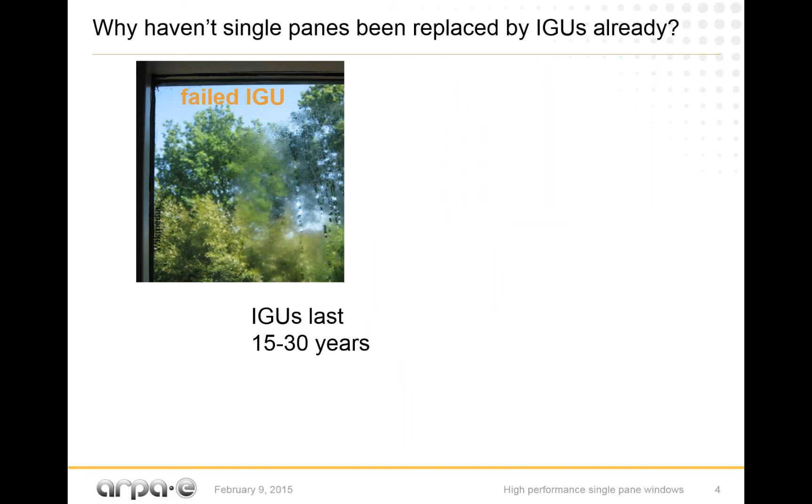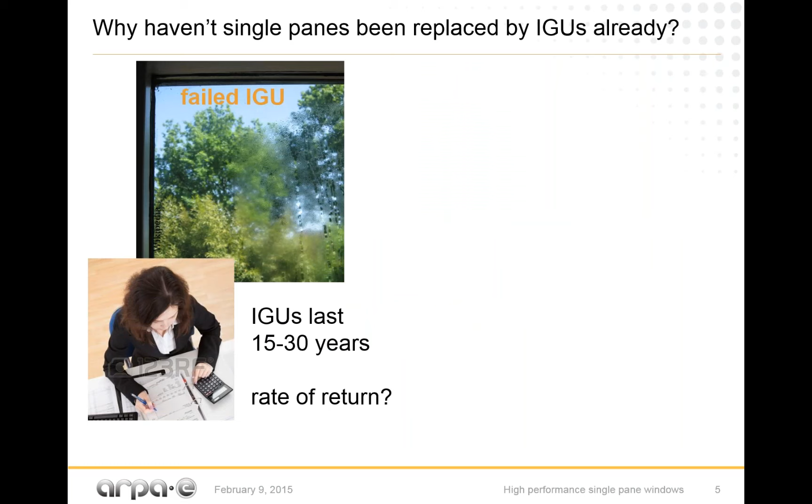So then why haven't single panes been totally replaced by double pane windows? And they've been there for 15 to 30 years. They're extremely expensive, and the rate of return is 10 to 15 years. So that's part of the reason why it doesn't have a wider adoption than it has.

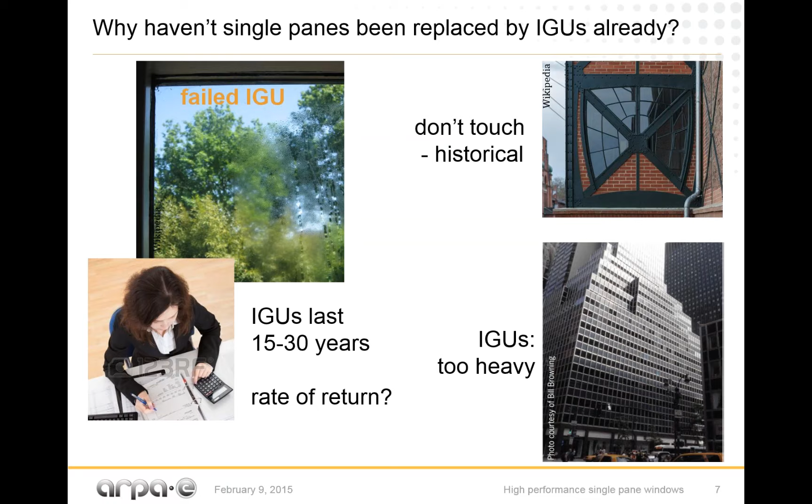So let me start first, before I tell you about the SHIELD program, with a little bit about ARPA-E. Maybe a lot of you know about this, but anyway. In 2007, the National Academy recommended to Congress that they create the Advanced Research Projects Agency focusing on energy. And it would be part of the Department of Energy.

And that was the goal, and I really feel that this is why most of the people in ARPA-E are there; they truly believe in it. It is creative, out of the box, transformative energy research, where risk and potential payoffs are very high, and where if successful, it will provide dramatic benefits to this nation. And since we're talking about renewable energy, this has been an incredible drawing card for them to hire people.

They have three pieces to ARPA-E. One is climate change. The other one is improving energy efficiency, and we have a lot of automobile programs and so forth. And the third one is renewables, and through renewables reduce energy imports.

We feel that we catalyze innovation because through grants and programs we can provide enough synergy for people to be free to innovate and have new programs. And with this forefront of innovation, all our teams are mixed university or company teams, very broad teams, and that seems to work very well. I think in the last 6 months there was a single program that is just one institution.

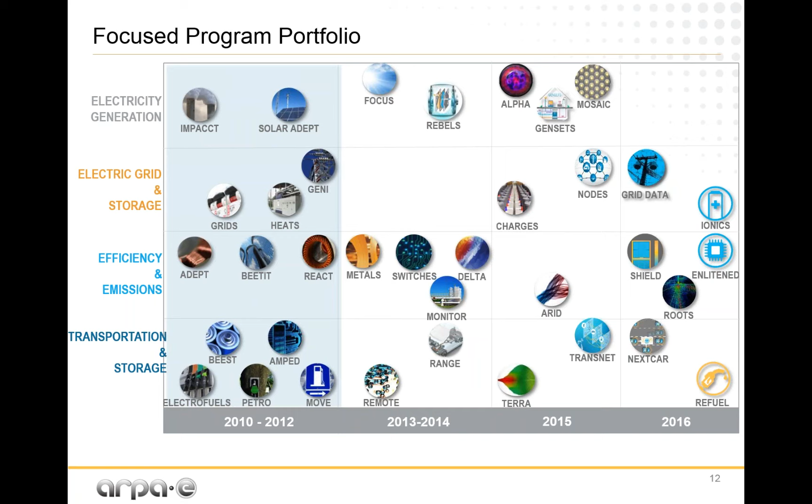So, like you see in any institution, I don't know about university, but in industry you see very clearly: you start with a number of programs, and out of those only a few make it to market. So it's like a funnel. And what we see at ARPA-E is essentially the same thing. We fund a lot of programs. Just a few, like 10 to 15%, are actually successful enough to make it to market.

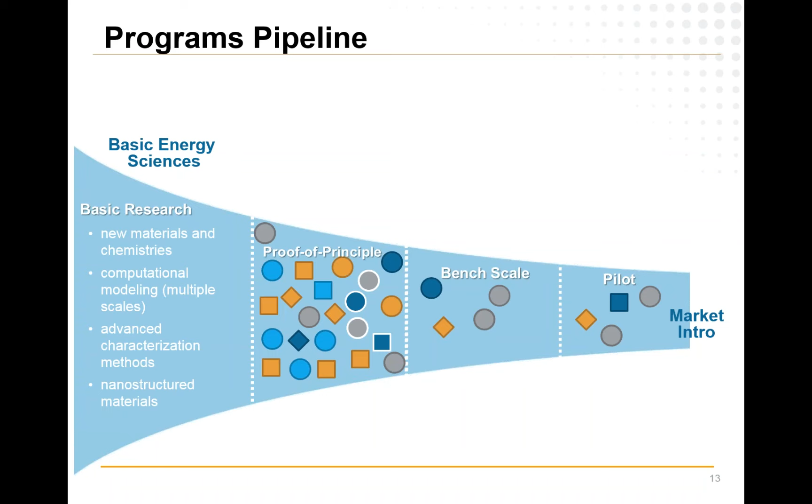So how we view ourselves is that when they apply for the grant, they are somewhere here. The program is still in the lab, really very basic research. And you see a percolation here, a loss; where it's clear there is no market or the technology didn't work out, whatever the reason, they will not make it through. The good ones, when they leave ARPA-E, are almost ready for pilot scale. The top 15% of the programs are either at a startup level or an incubator level.

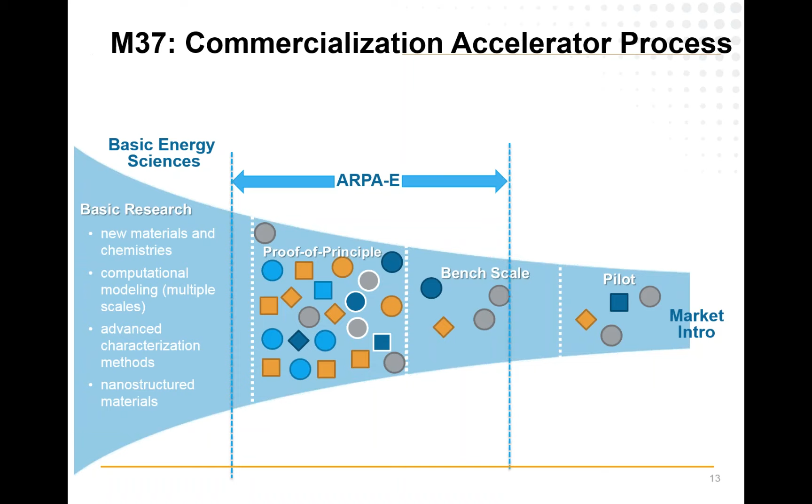But we still have to bridge this gap to market, right? So right now, 50% of my time I'm trying to design a program to help bridge this gap through external funding in combination with ARPA-E. Because if we make it this far, we have to push them this far. So just to go over that funnel, this is the distribution of the awards.

In the year, the people that are graduating this particular year, 2016, we have 41% of the awards go to universities, 32% go to small companies, 15% to large companies, 8% to national labs, and 4% to nonprofits; HARP, for instance, will be listed under nonprofits. Does that represent the prime? So this is of the awards, the prime.

Yeah. But if you take the 15% that are top this year, and it's interesting because between the top 15% and the rest there is a big gap. It's not that there is a gray area where you don't know where to put the cutoff. It's very clear where the cutoff is. And out of this top 15%, 63% are small companies. So university is pretty good. No national labs, the non-profits are also gone, and the large companies have decreased a lot.

So could you define what is top 15%? What is that? That you're at the incubator level or startup level. So is that you have a technology that people want. These are the applications that you receive, the top? No, this is after 3 years of the program. Oh. This is at the end of the program. Okay. So it's very clear who can go somewhere, who cannot. Okay. So there's still pre-launch

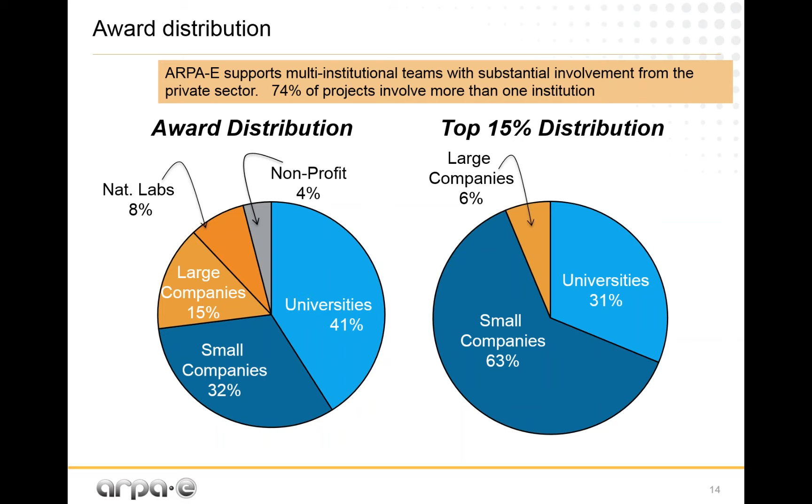So as we transition from R&D, from an idea into commercialization, you need money at different stages, of course, but there are some clear places where programs die. The first valley of death is getting out of the R&D phase into the prototype phase. The second one is trying to scale up, have a demonstration and deliver. And the third one is when you really have to go to manufacturing, where much more serious money is needed.

And what we're doing is we bridge the first two valleys of death with ARPA-E grants, and in a way we de-risk the program considerably, right? And I still have the feeling we give them a little bit more help with the transition and help them take it to the top.

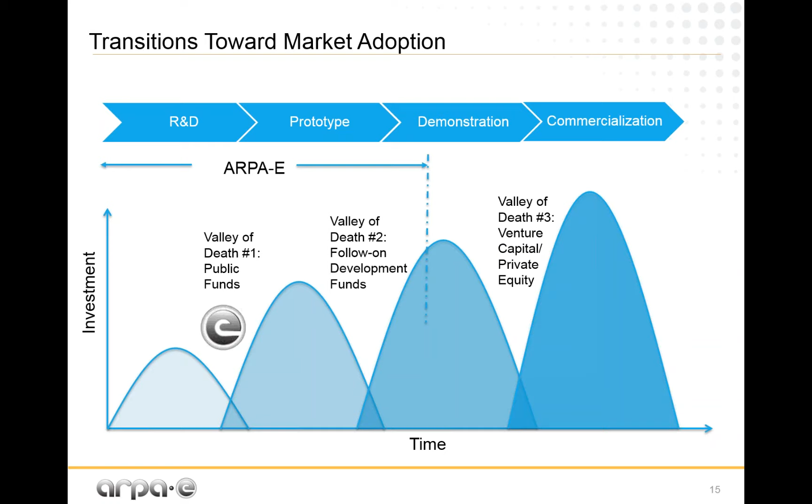So the next question that we always get asked is how DARPA and ARPA-E are different. There are a few differences, but we are very similar. The main difference is the tech-to-market focus and the fellows. We have a group of fellows that are keeping up with the technology much more than the rest of us. And the tech-to-market, which is my function, we have a large group, about 30 of us.

And the thought here is that from the very beginning of the grant, our job is to focus the group on whether there's a market, where you will enter the market, how much money you will need, how much it will cost to manufacture whatever you think you can manufacture. So stay focused, this is not an academic exercise. For us to succeed, they have to make it to market. So we're pushing on that.

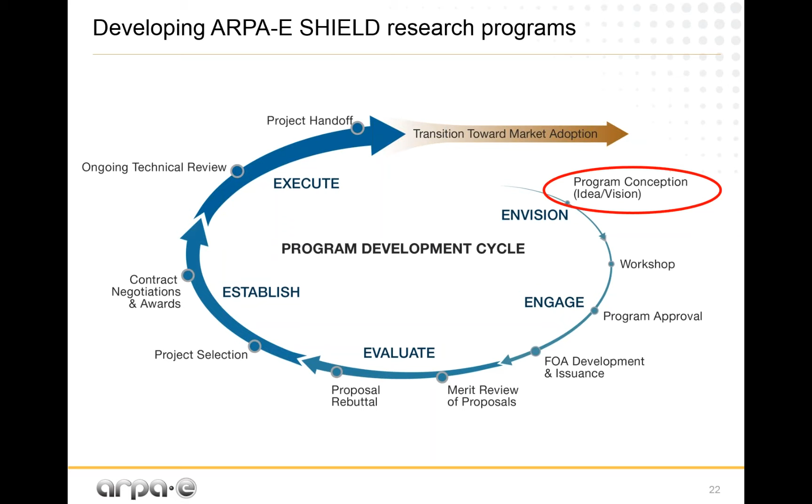So let me start on the Single-Pane Windows program with the program idea. So this is the reception area at ARPA-E. And you have these huge windows that are single pane, and everybody's always walking around with jackets. I mean, I have a coat in my office in the winter. Everybody else does, because you cannot live there in the winter and the summer. So I'm not surprised Eric chose to work on it because it was a survival technique.

But in the US, you have roughly 10 to the 10 square feet of windows. So you have 3 square meters of windows per person. So let me just do a little bit on windows. We have single pane windows, which is what we're going to be addressing. Double pane, which is what most people have in their house. And triple pane, which in Europe, for instance in Sweden, is standard, and in the US we have pretty much 0 triple pane. So how do you define windows? By the U factor, which is the heat flow from the interior through the window to the outside. If you want the window to be perfect, you have no heat flow, so U would be 0. The larger the U, the worse the window is. In a single pane window, the U is 1.1, and if you put a low-E coating on the window, you get down to 0.7. In the double pane, it's much better. You go from 0.7 to 0.3 with low-E.

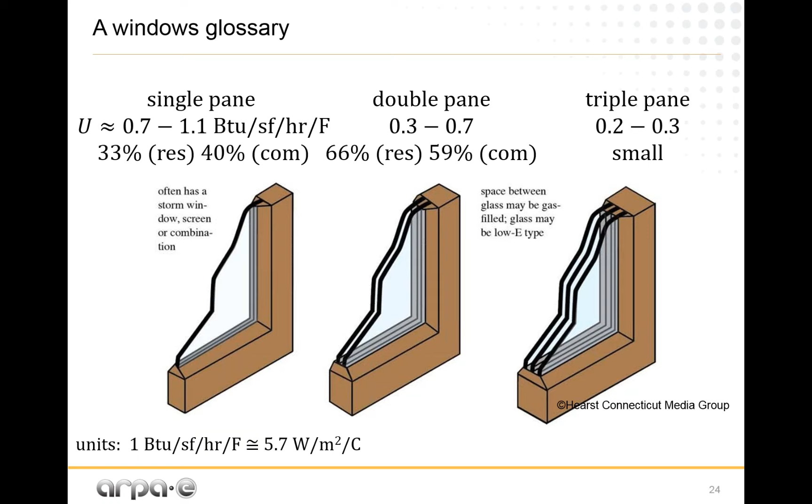How much energy are we wasting in the US? We are using 100 quads of energy per year. From that 100 quads, 15 are used for building heating and air conditioning. And from that, 4.7 literally goes out the window. 2 quads go out the window for single pane, and almost another 2 go out the window in double pane. The net solar is the difference between what you use to cool your house in the summer minus what the sun is heating through the window in the winter. So it's not so bad actually, because you use the sun in the winter. The bad thing is that 30% of the windows are single pane, 60% are double pane. So the fact that they're using the same tells you how much worse the single pane is than the double pane.

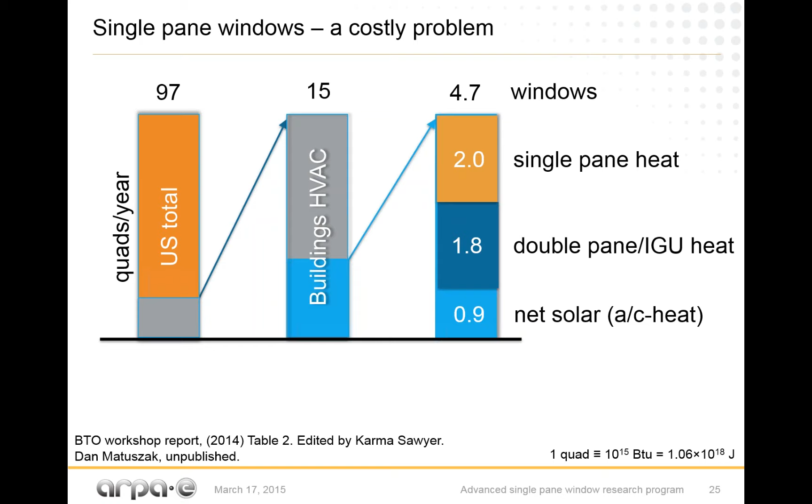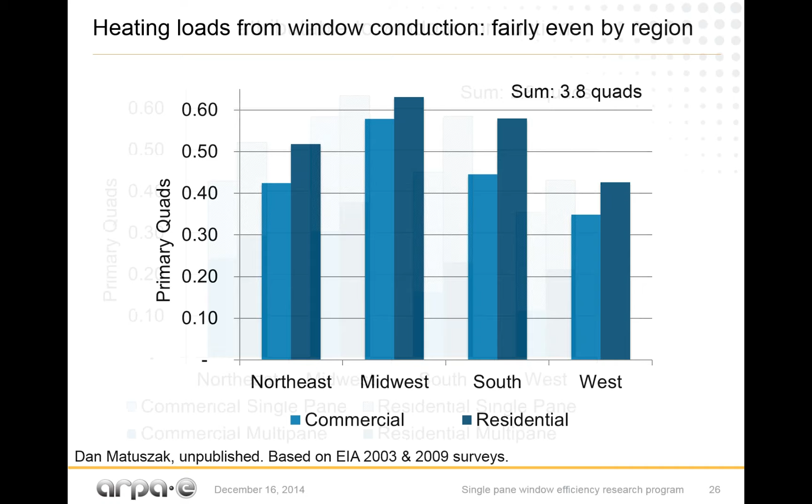And here it is in primary quads. In the Northeast, we are using about 0.4 quad for commercial buildings, 0.5 for residential, and nothing changes much through the different areas of the country, pretty uniform. Now, if you take this Northeast and split it between single pane and double pane, you see that essentially it's half and half, but again, you have double the number of double pane versus single pane.

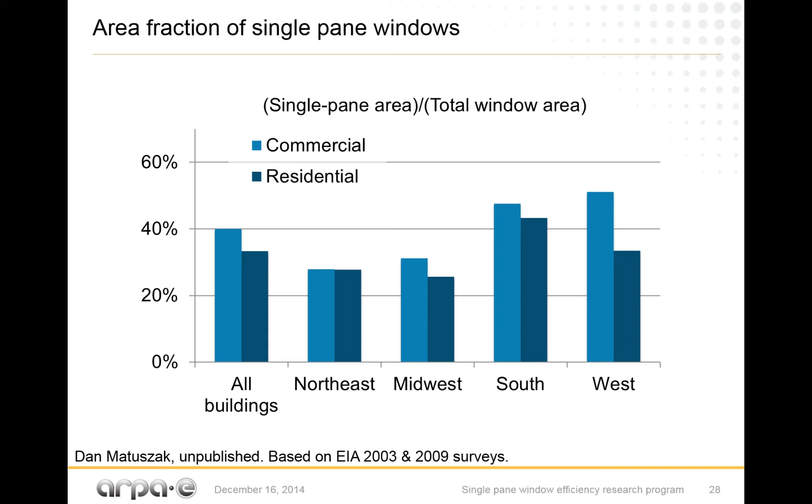This is the area: 40% of the commercial buildings are in single pane windows and 30% of the residential buildings. This is interesting because people say, why don't you just wait until everybody switches from single pane to double pane? But the thing is that they are not switching. They're switching very, very slowly. Here you have in the Northeast from 05 to 09, and it's like 2% a year that they are switching. So you will have to wait, unless you do something else.

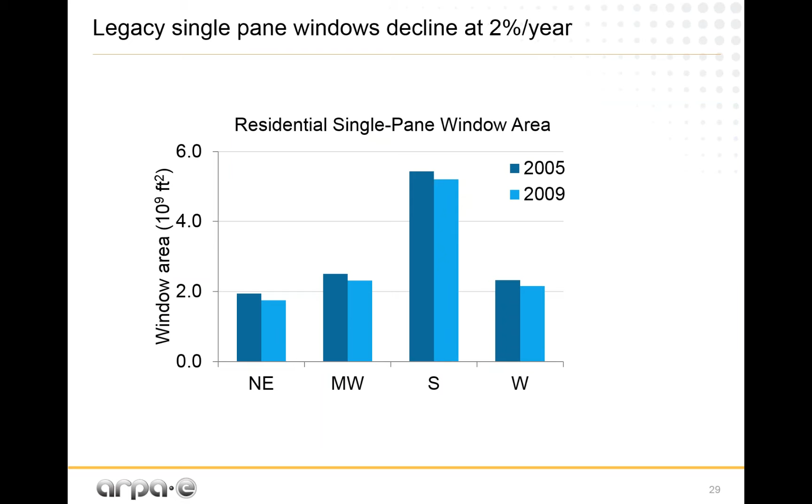And the South has a higher penetration just because they're newer housing? Or, sorry, no, it's higher. It's higher because they don't use double pane. It's the lowest number of double panes in the country. Another thing in the West is with such beautiful weather, we don't need double panes much either.

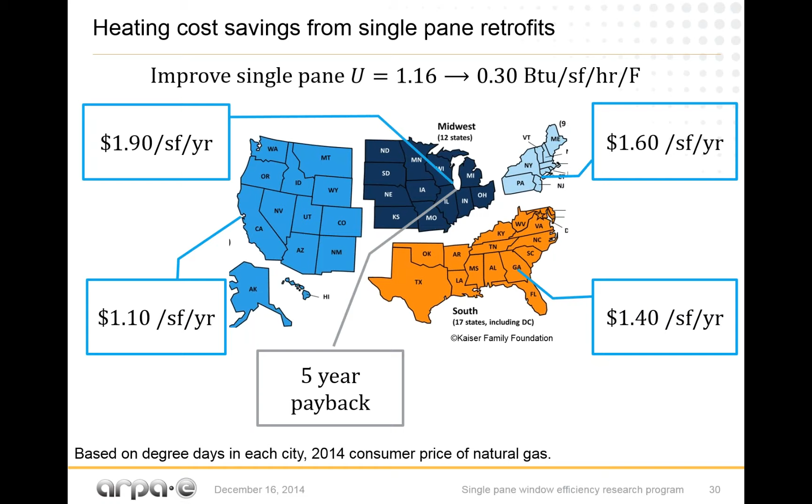Okay, here, how much will it cost you if everybody would switch from single pane that had a very high U to a single pane that has a very low U, which is what we're trying to make into this program. And what we found out is that instead of having a 15-year payback, as you would have with buying the $100 a square foot double pane windows installed, you would have a 5-year payback. And here we calculated using the local natural gas price.

So if the market were going after that, we spend $10 billion per quad for heating, and you have four quads of heating essentially in the U.S. So we're using $40 billion. And we have 15 billion square feet of windows that are single pane. Within the program, we are proposing to sell installed windows for $10 a square foot rather than $100 a square foot. And that will be a market of over 150 billion if you were to convert most people. So the $100 a square foot is if you convert directly from single pane to double pane.

Yeah, if you want to install the double pane, the fancy windows that have this little screen in between and so forth, those are around $100 per square foot, the top of the line, right? And this one, we're proposing either $5 per square foot in one of the programs, and $10 per square foot.

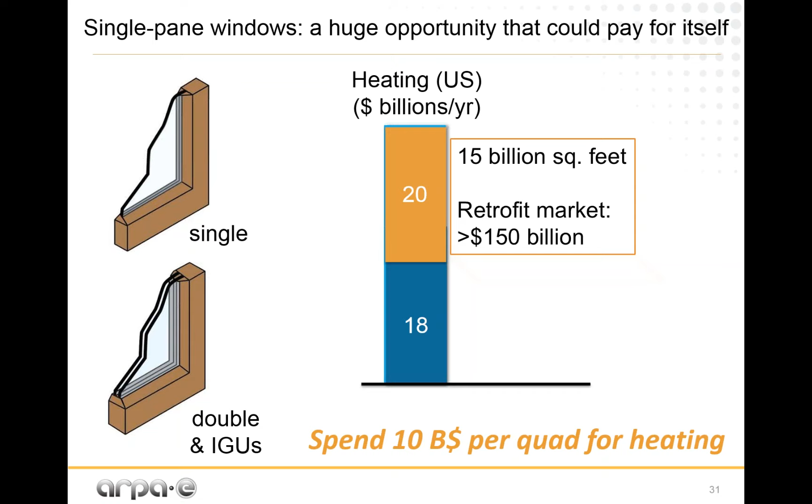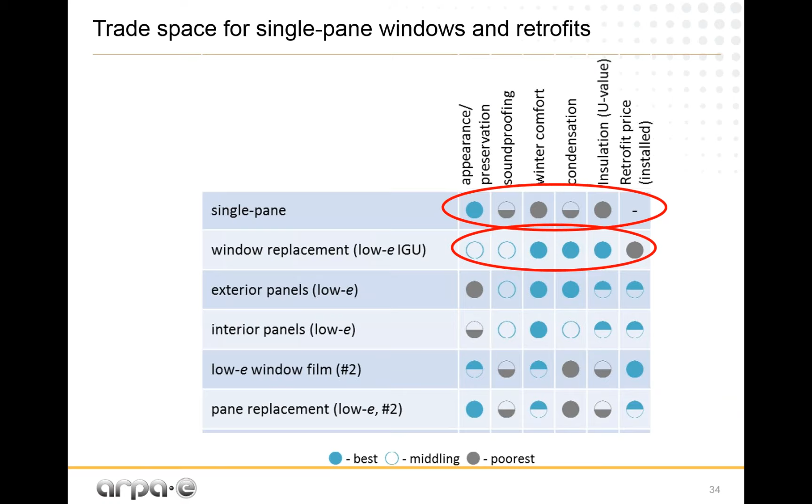And the double pane window is here, where the appearance is not so good. The soundproofing, none of them are very good. The winter comfort, the condensation and the insulation are very good, but it's extremely expensive.

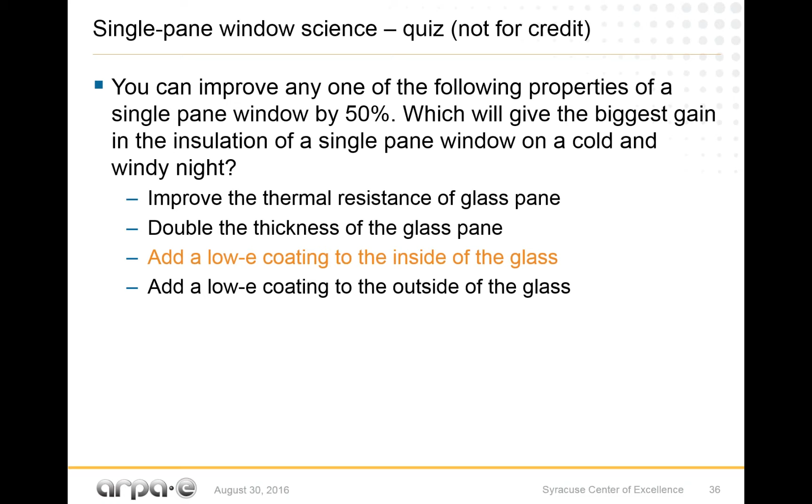So this is a quiz, not mine, but he was thinking: if one were to consider what would be the main thing in the winter, on windy days, controlling the insulation of the window. Will it be the resistance of the glass? If you double the thickness of the glass, will that increase the insulation by 50%? Would it be the low-E coating inside of the glass? Would it be the low-E coating outside of the glass? And many people were surprised that the low-E coating was controlling it. So I wanted to go over that in a little more detail.

Let's assume we have a windy day in the winter here in Syracuse with -18 degrees and very windy, and inside the house we have 21 degrees. So we have air conduction going, cooling a little bit around the glass. Now the emissivity of the glass is 0.8, which I found incredible. It's like a black body. The emissivity of a black body is 1. The emissivity of a tile roof on a house is 0.88. So this is as absorbent as the black roof on a house, which for me was totally surprising.

So with that in mind, when the room is heating at 21 degrees, all the walls are like an oven toward the glass. So everything that the walls are radiating is being absorbed by the glass.

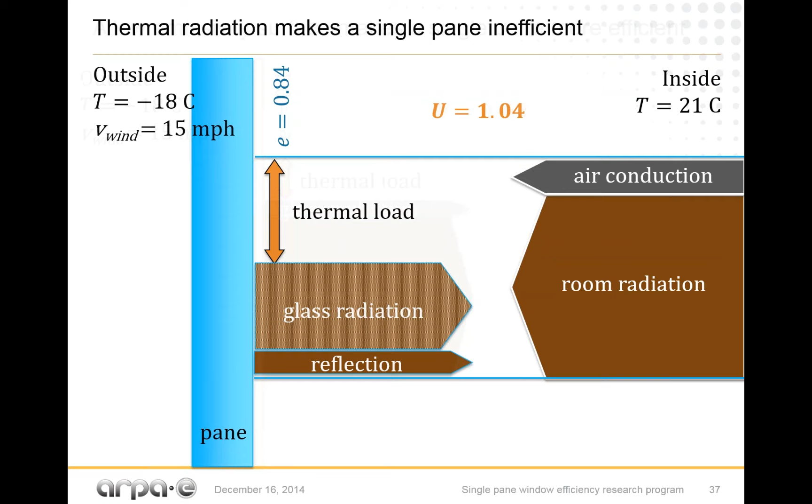And then it re-radiated at a much colder temperature because this glass is very cold from the outside. So essentially, you're cooling the room enormously. And so only 16% of the radiation is reflected, so the rest is really literally going out the window. So the U factor is determined by the difference between these two components and these two components. And it's telling you how much is going to go out the window, and the U of a single-pane window is 1.04.

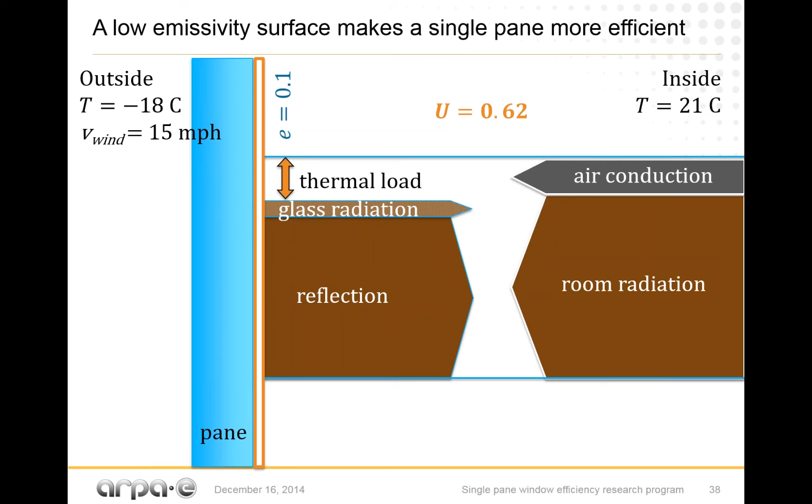Now, if you take the same glass and you put a low-E coating, if you put a thin layer of aluminum, the emissivity is 0.1. So everything is essentially reflected, and very little is absorbed. So these two pieces are reversed: 90% of the radiation is reflected, so the heat is kept in the room. And only 10% of the radiation is re-radiated and cooling a little bit. But essentially, with a low-E coating, you keep the room warm.

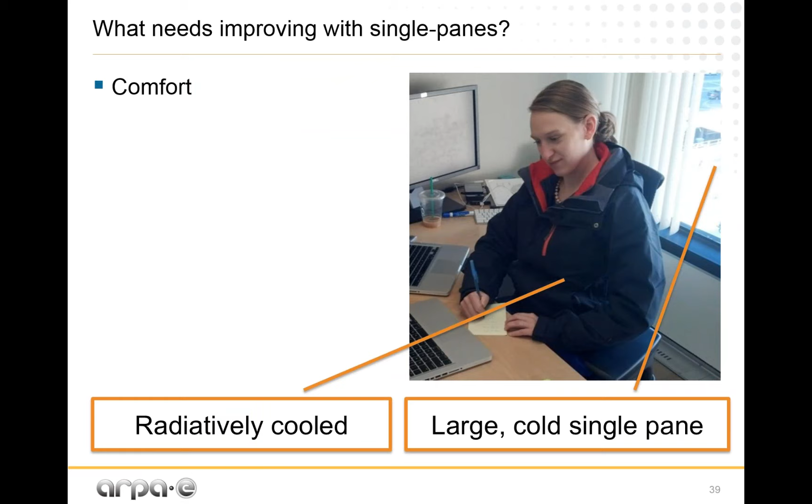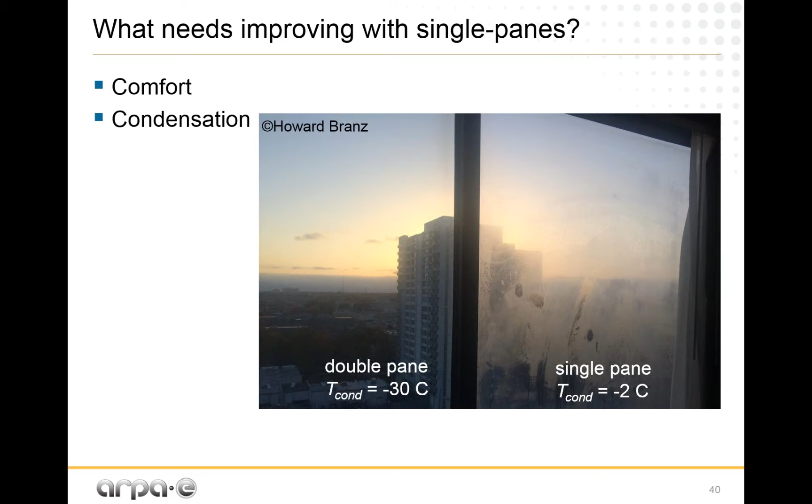So another thing that came out of the workshop was what other qualities we will need in the window. This is another photo of one of our offices with people in the window. So essentially, she's radiatively cooled by the window. This is another picture of a single-pane with condensation, because I didn't realize that single-pane windows condense at minus 2 degrees Celsius. If you have a double-pane window, they don't condense until minus 30 centigrade. So that's a huge difference. And once you have condensation, essentially the low-E coating is very difficult. So that was something that we wanted people to address.

Soundproofing was another thing we wanted people to address because of city noise, like in New York City. And surprisingly, even if we put it in specifically, nobody was interested. We kind of forced some of them to do it, but it wasn't in their interest, I don't think. The other thing was if you save energy by reducing the heat loss through the window, then it's cheaper to maintain.

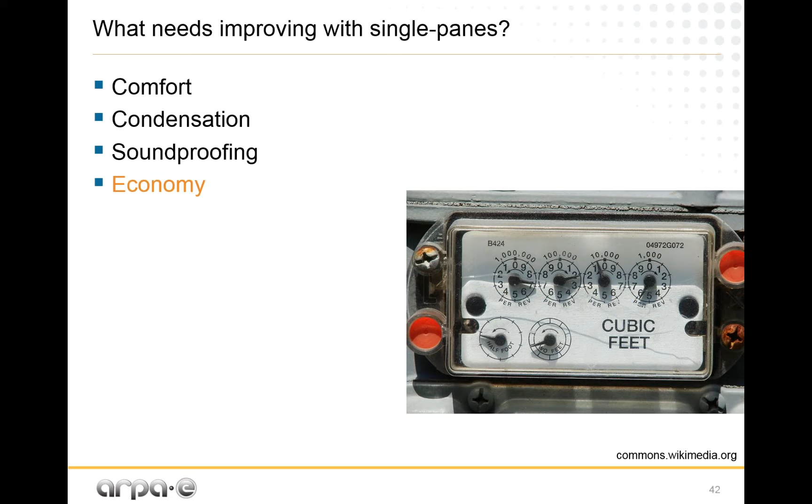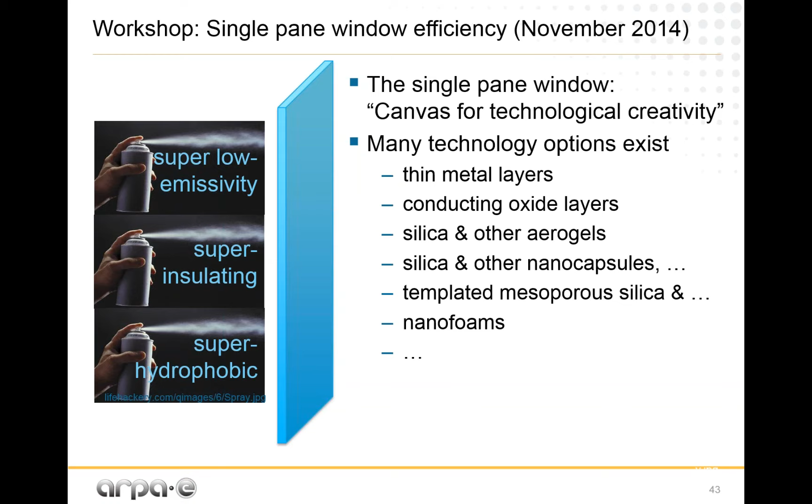So what came out of the workshop was a single-pane window should be a canvas for new technology creativity. And there are many, many technology options. Thin metal layers is one of them. So a lot of the proposals did address low-E, or more inexpensive, more interesting ways to achieve low-E. There was a lot of nanomaterial work proposed. Another group was considering silica aerogels, nanocapsules, and so forth. There are some mesopores and nanofoams. It was a variety of proposals.

So after the workshop, Eric wrote the funding opportunity, and the idea here was to grant $10 million to SBIR, and $20 million to all other entities. The program name came out to be SHIELD, which is single-pane highly insulating efficient lucid designs. Okay, so what we asked people to do was achieve with a single-pane a U of 0.28 instead of 1.04. So it's a huge change. And the way to do that would be you need to have a low-E coating for sure. But you also have to have a transparent super-insulator on the interior of the glass pane.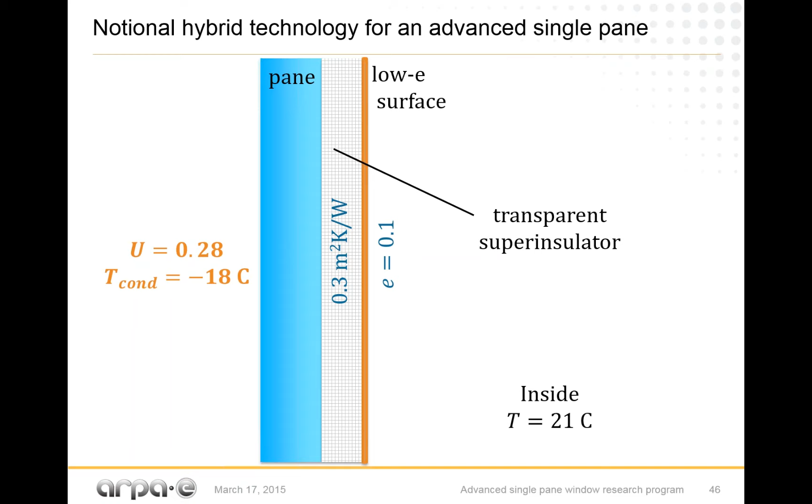So the thought here is the following. This is kind of interesting. We were trying to figure out what condensation temperature to ask them for as you get down in the U factor. So in a single-pane window, as you come down in the U factor, the condensation temperature doesn't change much. But then when you start adding a super-insulating barrier, it just drops very fast. And so with an insulating barrier in a single-pane window, you can get to a condensation temperature of about -15 degrees. It's not as good as the double pane, but it will be much better than -2 degrees.

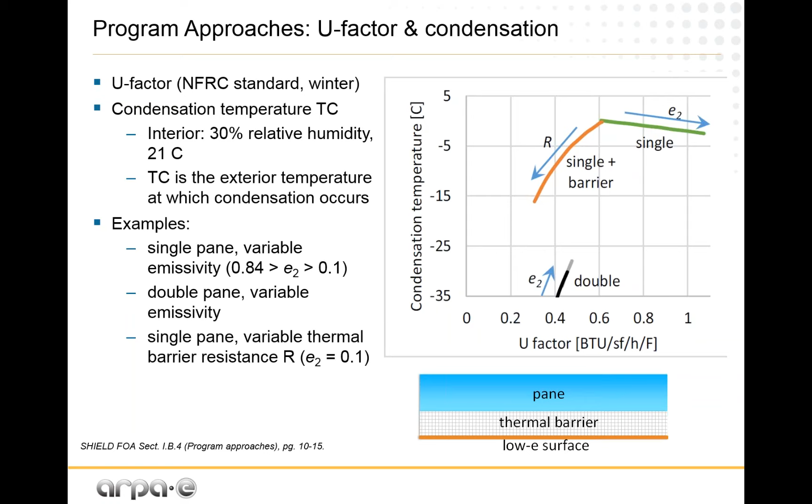So as a super insulator, what would you do? Glass has a thermal conductivity of 1 watt per meter degree. And there are tons of things that have much lower thermal conductivity, which is what we want here. For instance, krypton and argon and air. Krypton is what they wanted to use for the double pane window. Now they are using argon. But aerogels are just as good as the air-filled double pane windows. And then you have polyurethane foam, polystyrene foams, and so forth.

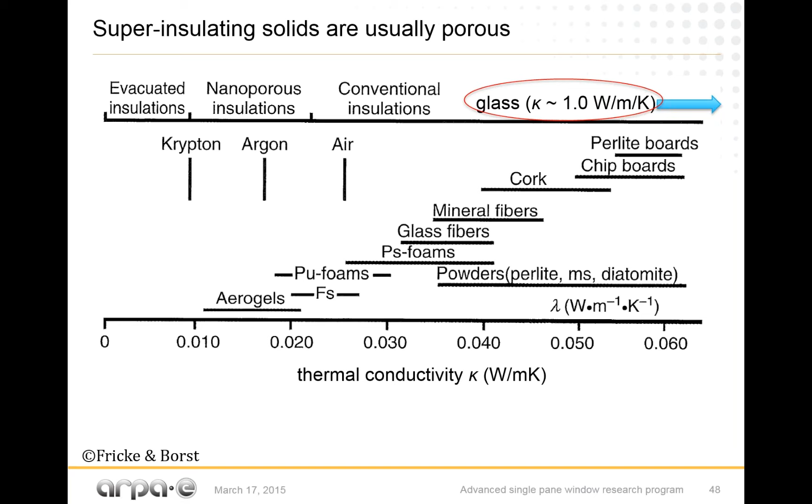Now, the catch here is that all these nanoporous materials are not clear. So you would have to design a clear nanoporous material, and that is pretty hard. And that's what we're asking the groups to do. And the issue here is that the light scattering goes like the third power of the particle size inside the nanofoam. So a 500 nanometer particle size scatters 1,000 times more than a 50 nanometer particle size. So they will have to keep the particle size below the wavelength of light, plus very, very uniform, because just a few will throw the haze way up.

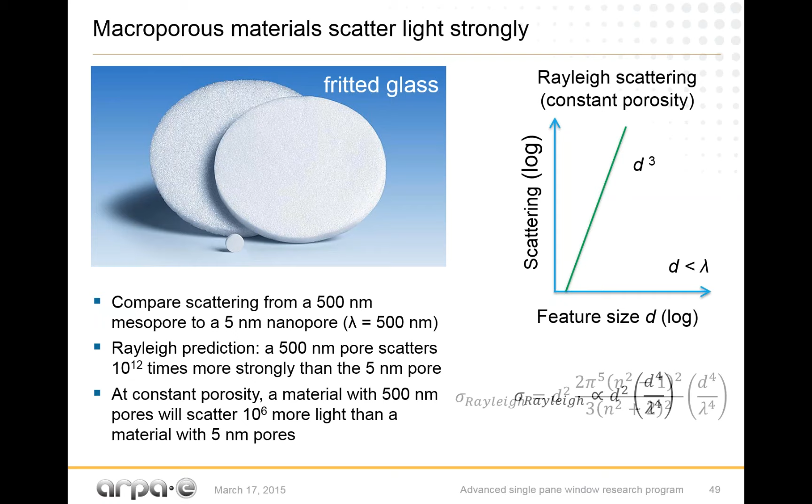So the problem is the silica aerogels have average pore size of 10 nanometers, but you really have to keep all the pore size throughout the aerogel around. We were thinking below 50 nanometers to make it totally clear.

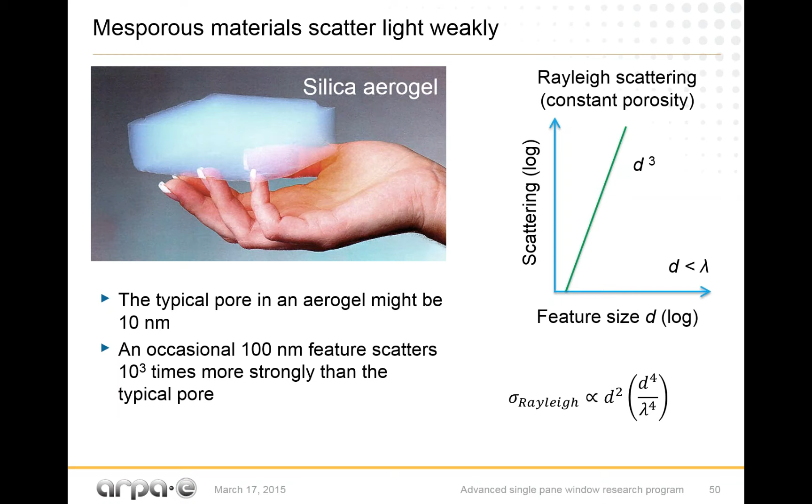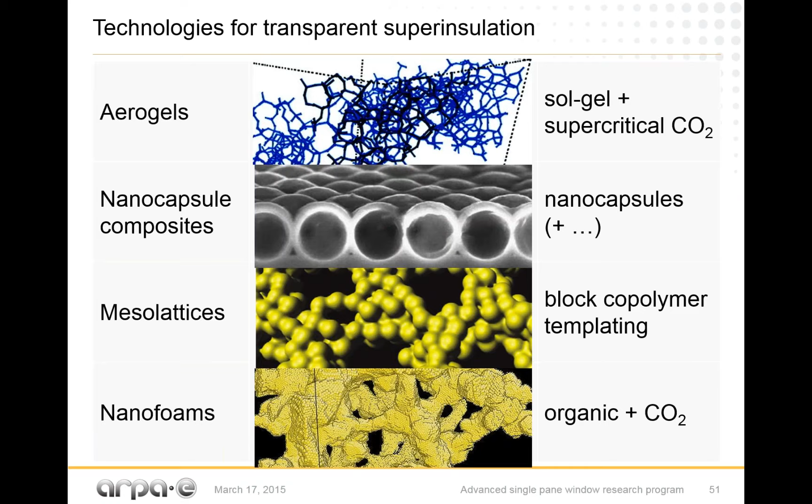So people have proposed all sorts of things from nanofoam, mesolattices, nanocomposites, and all sorts of aerogels.

And what we're calling for is 3 different types of products. One, we just have an applied product, which you have the low-E coating, the super insulator, and you can stick it on a glass pane. You will not remove the window, you will just coat it on or laminate it onto an existing pane. Category 2 is a single pane new window, where you replace the existing window with something that will be much better and much, much cheaper than a double pane window.

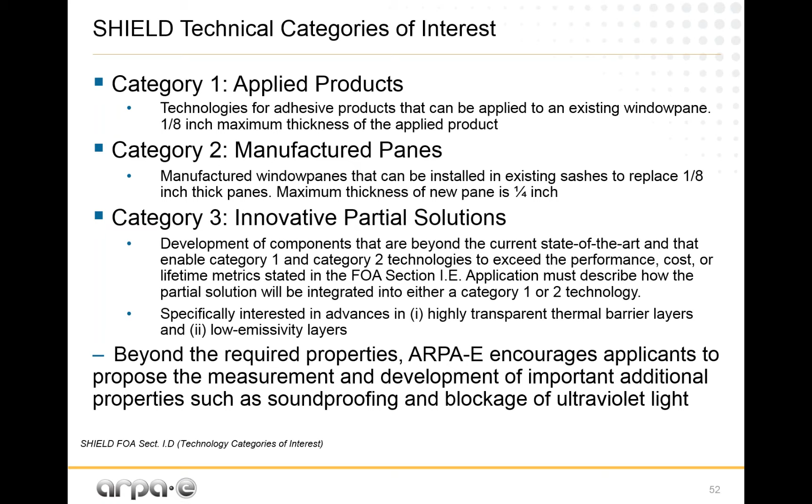Category 3 is a partial solution, which could be either a different low-E coating that is much cheaper than the Pilkington or the 3M coating, or it could be some sealing for the edge of the windows to avoid condensation and so forth. So anything that would help all the other groups too, that even if they don't have a good solution, we can apply that solution in combination with other groups.

So in category 1, I just want to highlight the things that are really hard. We want a haze less than 2%. The condensation temperature has to be -5 degrees. I thought it was not good enough, but that's what it is. And we want it less than $5 per square foot, so it's a very inexpensive solution.

So what are the existing applied products like, for example the 3M? The 3M is like $25 per square foot. Eric was saying something because he was calling manufacturers, and he said some are asking for installed at $35 per square foot.

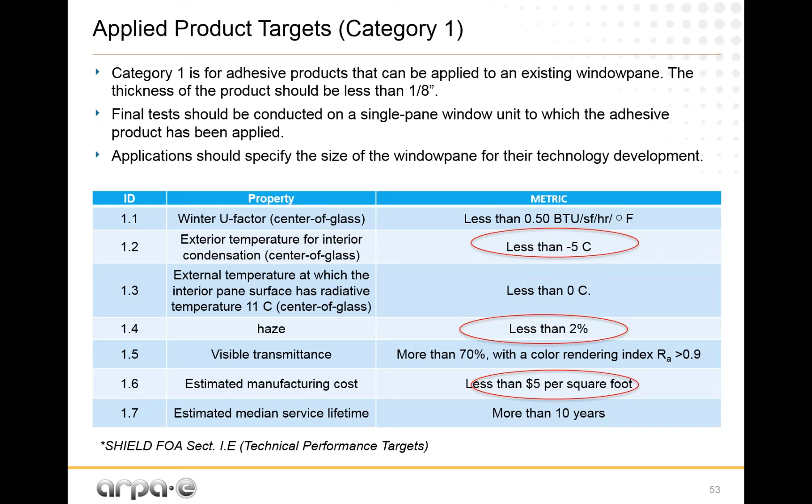And then the U-factor that you usually get with it -- well, that would be the 0.3 minus the 1.1, so it would be a 0.8, right? So this would be better. And then some of those also help with condensation, right? With the coating that you apply, they go on.

And the second solution, which is the one that replaces the single pane window, you want a haze of less than 1%, which is really like a normal window. The condensation will be minus 10 degrees, which is pretty rare for most climates, and $10 per square foot installed.

Is there any way you apply any materials to the glass itself? Yeah, the first solution you could do that -- unlike the glass sort of manufactured inside the glass. Nobody proposed that for the glass itself. I mean, you could in principle, although it's very high temperature. Nobody has proposed that, but people have proposed, for instance, painting the coatings. But this is an assortment of proposals here.

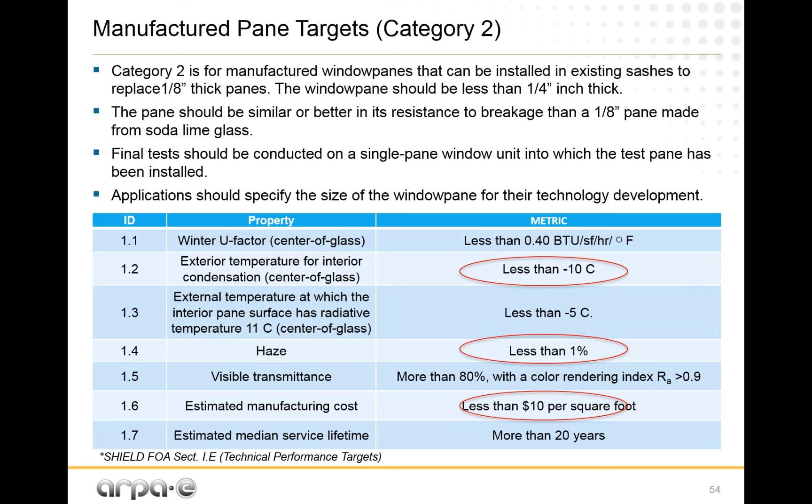So the relative performance we were looking for: the single pane was the performance in the first line, the double pane is in the second line. The appearance is not as good on the double pane as the single pane. The soundproofing is about marginal difference. The winter comfort, of course, in the double pane is much better than single pane. Condensation much better, insulation much better, but it's very expensive.

And these two proposals we are trying to do here are something that match the single pane -- it's a single pane essentially. So the appearance is unaltered, and the rest you improve not as much as you would with the double pane, but you have a 10x less price than you have with the double pane.

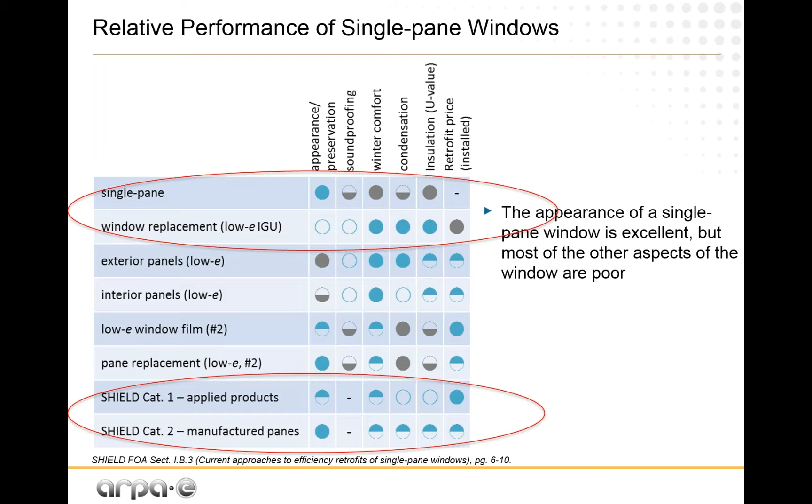The cost targets, right -- were we giving the proposals some kind of guidance on volume? Is it low volume, high volume? We didn't say anything. The manufacturer, I don't know, say 1 million square foot. Really, it wasn't manufactured at 2 square feet, right? Eventually, they have to do a cost analysis with a certain number of square feet.

Yeah, it will be a handmade coating, I don't think. And even scaling up the materials -- with nanomaterials, a 5 gram sample will cost you a lot, but if you do a 50 gallon batch, it's much less expensive.

So we went through the selection process, and we awarded $31 million on the window proposal. Here are the different organizations that got the award.

We have 3 SBIRs. This is a San Diego company; the CEO left about 2 years ago. IR Dynamics and Triton. And the rest are normal awards.

Here we try to categorize what the different programs were proposing. So there are a lot of silica aerogels, then some porous variants of different materials, and these are totally different approaches that get the super insulation properties by other means.

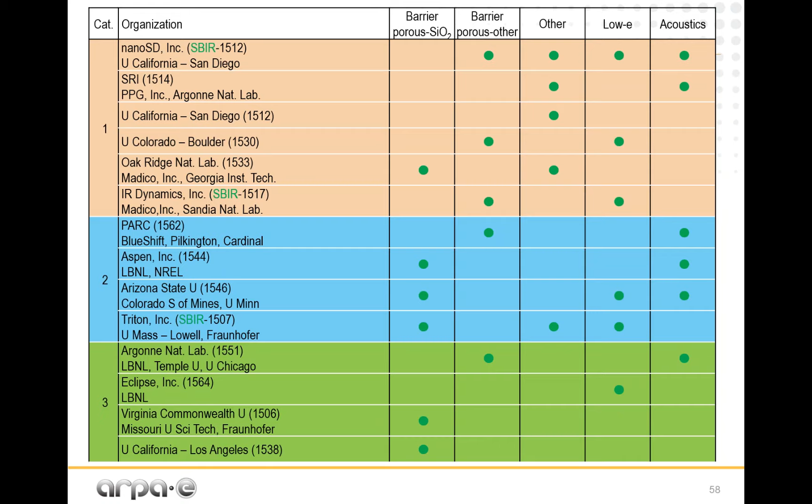Some are trying to make different low-e coatings that are much cheaper, because the 3M approach is really expensive—coating nanomaterials and so forth. A few of them have enough to claim they were going to measure the behavior of the window.

So right now we are finishing all the negotiations to get them under contract. The SBIR has to come under contract in a few weeks, and the other ones will follow after that.

So here we try to put a little bit of history on how windows started. The first windows in 1850 started with storm windows. In 1925 they started with sheet glass, which is the historical houses—you see all this very non-flat glass. And float glass, which is very, very flat glass, started in the 60s, late 50s.

Once you have truly flat glass, you can go into double pane windows because you can seal them, and that started close to the 70s. They added the low-e coating to the insulating glass in the 80s, and this independent low-e window film like...

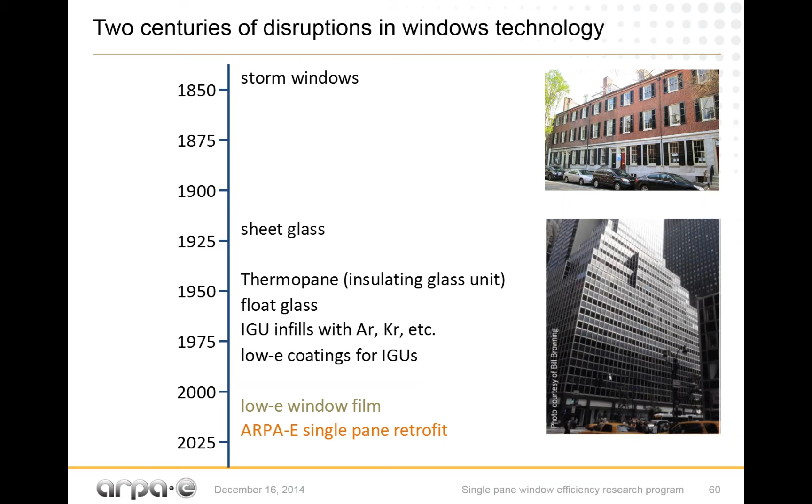Single-Pane and 3M a few years ago, 10 years ago—we're hoping that maybe we can add one of our proposals, something interesting enough that we can add to this list. So maybe we do that. If it works, we will matter, and I hope windows will matter.